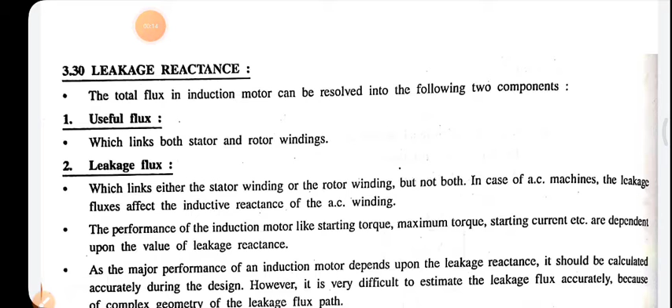Hello students, in today's lecture of AC machine design, we are going to talk about the calculation of the leakage reactance. Now, first of all, when we start the calculations of the leakage reactance, we should be aware of what leakage reactance is, and for that we need to understand a term called leakage flux. In case of the transformer or the induction motor, you might have heard the word leakage flux. What happens?

We are quite aware of the fact that whenever a supply is given to the stator winding, or in case of the transformer, when the supply is given to the primary winding, it carries the current. Due to the current carrying conductor or the coil, there will be flux that is being set up. Now that flux is known as the main flux. Now this main flux links with the rotor circuit.

This main flux that is being generated due to the current in the primary winding or the stator winding, some part of it links with the rotor circuit, some part does not link or links with the stator itself, and some of the flux links with both stator as well as rotor. So this is what happens when the flux is produced. Some part of it links with the rotor, some part links with the stator itself, and some part links with both. So based on that, the total or main flux is divided into two parts, that is useful flux as well as the leakage flux.

Now what is useful flux? As the name suggests, the flux that links with both stator as well as rotor winding is known as useful flux. And the flux that links only either with the stator winding or with the rotor winding but not both is known as leakage flux. Now leakage flux is not desirable for us. In case of the AC machine, the leakage flux affects the inductive reactance of the AC winding.

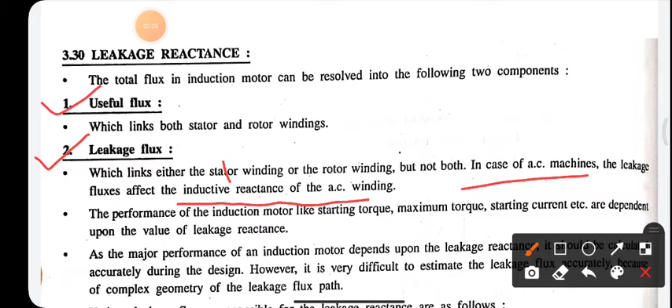Now we all are aware that the inductance is related to the flux linkages. So when the flux linkages change, the inductance, and in return the inductive reactance, changes. Due to the changes in the inductive reactance of the motor or the AC winding, it affects the performance of the induction motor in various aspects like starting torque, maximum torque, starting current, etc., which are dependent upon the value of the leakage reactance. So we can say that the performance of the induction machine is dependent upon the value of the leakage reactance up to a certain extent.

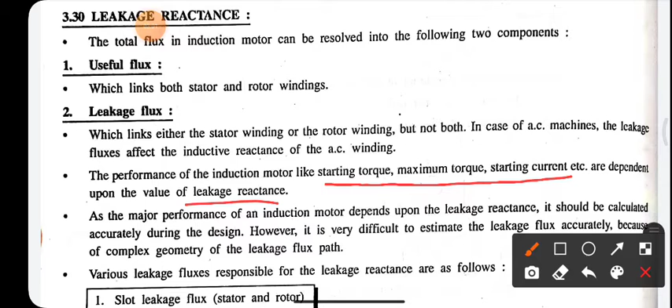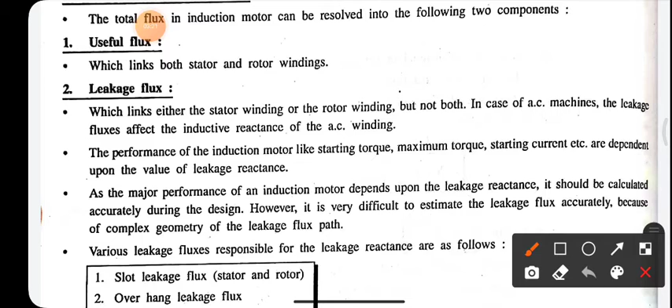So the calculation of the leakage reactance becomes an important aspect for us when we are talking about designing. We need to calculate it accurately, but it is a difficult task. Why? Because in an induction motor there is rotor, there is stator, there is air gap, then in rotor and stator there are slots and teeth at each place. The reluctances will be different, as the air gap length varies, as we have already talked. So it becomes very difficult to estimate the leakage reactance.

Now the various leakage fluxes, or where the leakage flux is present, are given over here. Slot leakage flux, that is for both stator as well as rotor, as I have told you. Then overhang leakage flux, zigzag leakage flux, and differential leakage flux. So these are the leakage fluxes that are present in an induction motor.

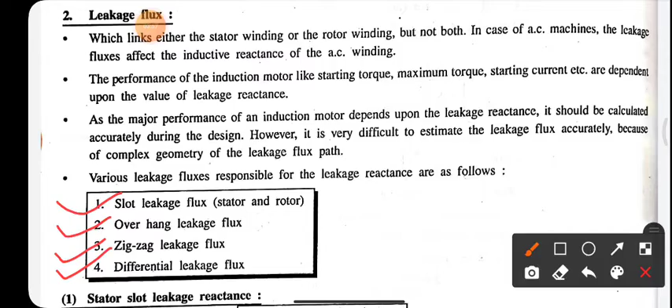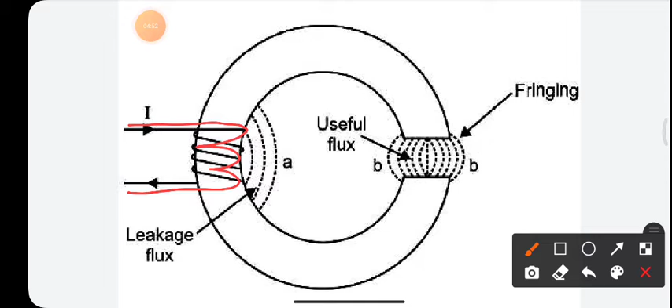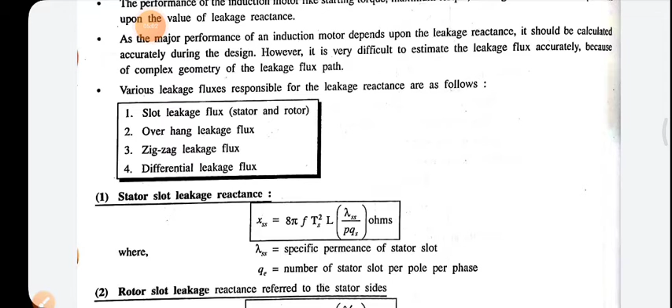Now that is known as our leakage flux, right? So we are going to have the equations of each and every leakage reactance. First, we have seen there are 4 types of leakage flux available. Now, based on that, how can the reactance of that leakage flux be calculated?

So stator slot leakage reactance is given by XSS. It is given by 8 pi f Ts squared L lambda SS upon P into Qs. Now in this equation each notation is quite clear, but the only new notation is lambda SS. What is that? It is the specific permeance of the stator slot. Now what is permeance? Permeance is nothing but the ease with which the flux can be set up; it is nothing but the inverse of reluctance.

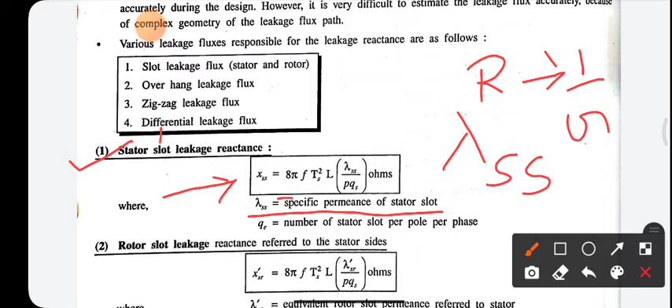Reluctance is nothing but the property of a magnetic material to oppose the flux through it. Okay, and the permeance is nothing but the inverse of it. We can also compare it in the same way as resistance and conductance. In the same way, permeance and reluctance are inverse of each other.

And then there is Qs. Qs is nothing but the number of stator slots per pole per phase, right? So this equation is for the stator slot leakage reactance, in which you should know what lambda SS is, and Qs, that is the number of stator slots per pole per phase, right?

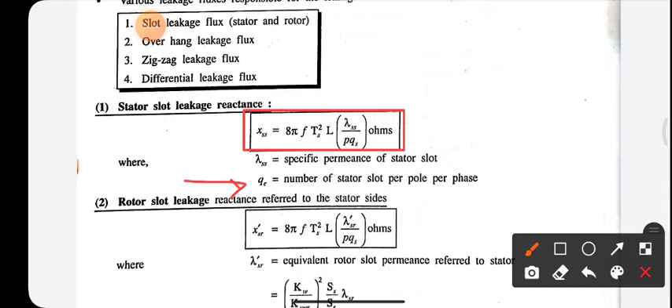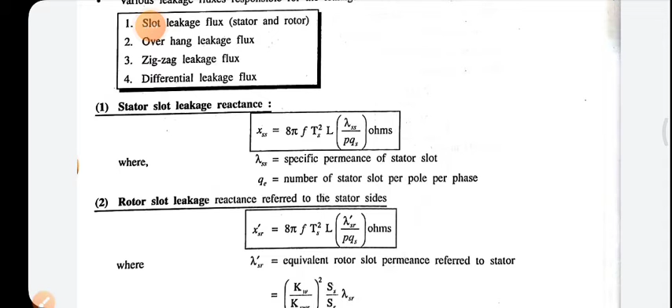So moving further, rotor slot leakage reactance. We have already talked about the stator slot. Now the rotor slots, and that also we have transferred to the stator side. In transformer also you might have done the numericals, or seen the theory in which you are transferring all the parameters either on the primary side or on the secondary side, and they are either multiplied or divided by the transformation ratio, that is K. So in this also we are transferring the rotor slot leakage reactance to the stator side.

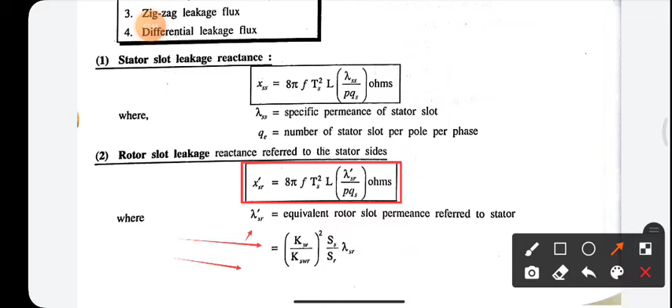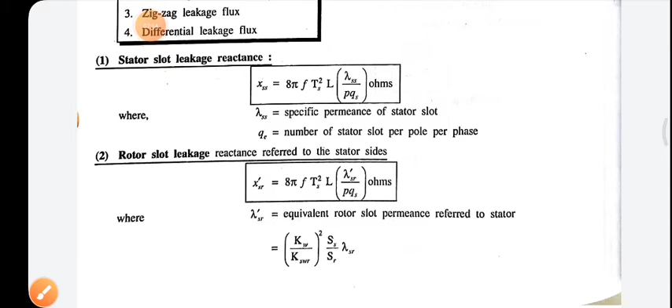So the equation becomes XSR is given by 8 pi f Ts square L lambda dash SR, that is nothing but the equivalent rotor slot permeance referred to the stator side, and for that we have to multiply it with Kw upon Kwr square, Ss upon Sr, lambda Sr. Here Ss is the number of slots in the stator and Sr the number of slots in the rotor. So this is the rotor slot leakage reactance when referred to the stator side.

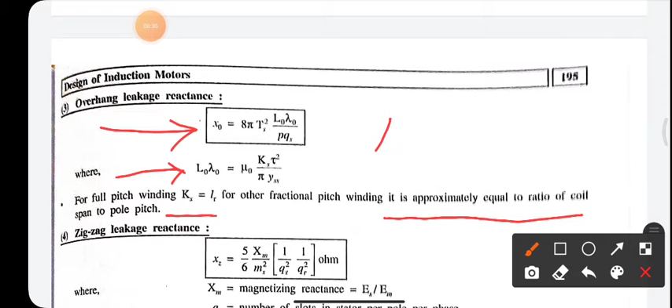Now moving further, overhang leakage reactance. Overhang leakage reactance is given by the equation X0 is equal to 8 pi f Ts square lambda 0 L0 upon P into Qs. Now lambda 0 L0 is given by mu 0 into Ks tau square upon pi YSS. For the full pitch winding Ks is equal to 1. For the fractional pitch winding, it is approximately equal to the ratio of the coil span to pole pitch. So this is the equation for overhang leakage reactance. The derivation is not provided, you have to remember these equations.

Now moving further, zigzag leakage reactance. The zigzag leakage reactance is given by 5 by 6 Xm into 1 upon Qs square plus 1 upon Qr square. Xm is the magnetizing reactance, given by Es upon Em. Qs is the number of slots per pole per phase in the stator. Same way, Qr is the number of slots per pole per phase of the rotor.

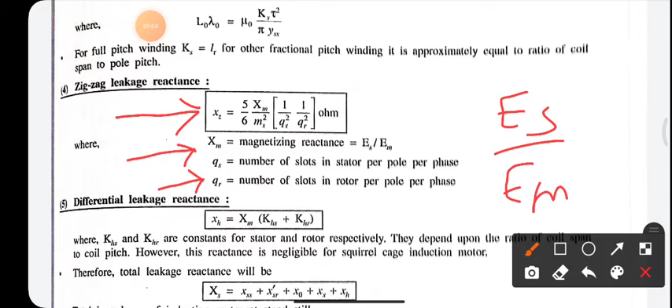Now the differential leakage reactance is given by Xm into KHS plus KHR. These are the constants for the stator and the rotor, and they depend upon the ratio of coil span to coil pitch. This reactance is generally negligible for the squirrel cage induction motor. So now the total reactance is nothing but the addition of all the reactances, that is Xs is given by XSS plus XSR dash plus X0 plus XZ plus XH.

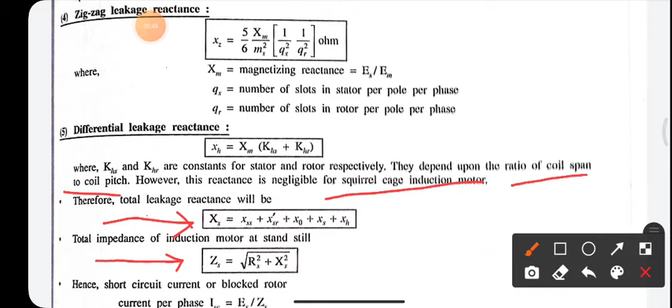Now the total impedance of the induction motor at standstill is given by under root Rs square plus Xs square, right? And when the rotor is blocked, or short circuit, the current per phase is given by Es upon Zs, and the power factor cos phi SC is Rs by Zs.

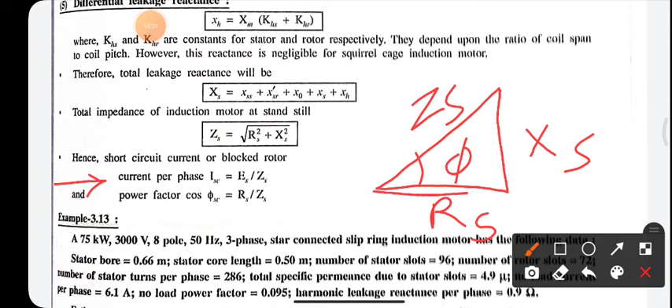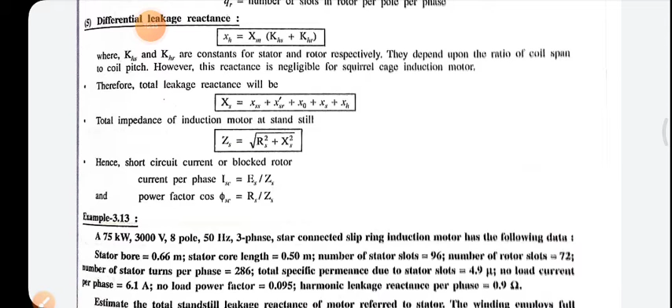Now how are we getting this? Remember an impedance triangle in which there is Z, R, and X, and since we are considering it for the stator, it will be S. So this is phi, and cos phi SC is given by adjacent side by hypotenuse. Adjacent side is Rs and hypotenuse is Zs. So the power factor cos phi SC is equal to Rs upon Zs. So this was the leakage reactance calculation for the induction motor, and based on that a numerical is given over here.

So now here in a numerical, a 75 kilowatt, 3000 volt, 8 pole, 50 hertz, 3 phase, star connected slip ring induction motor. The data is given to us. Stator bore is 0.66 m. Stator core length is given, that is, the main dimensions D and L are given. The number of stator slots is 96, number of rotor slots 72, number of stator turns per phase 286.

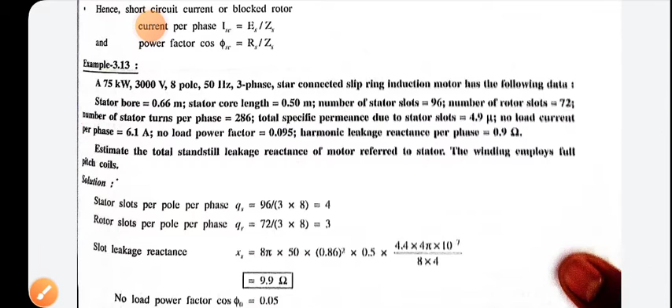Total specific permeance due to the stator slot is 4.9 mu. No load current per phase is 6.1. No load power factor is 0.095. Harmonic leakage reactance per phase is 0.9 ohm. So this is the data provided to us, and what we need to find is to estimate the total standstill leakage reactance of the motor referred to the stator side.

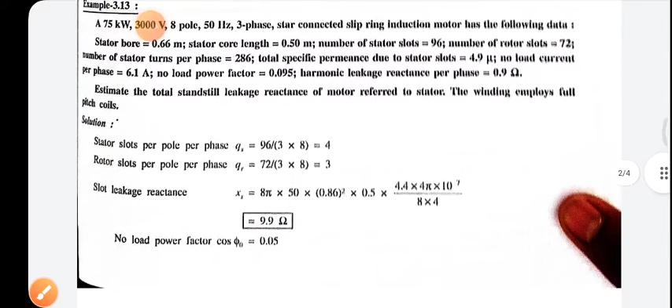Now first of all we need to find the slot leakage reactance, and for that the equation was xs is equal to 8 pi f Ts square L into 4.4, 4 pi into 10 raised to minus 7, upon p into qs. What we require is already provided in the data. When we place those values, we will get the answer 9.9 ohm.

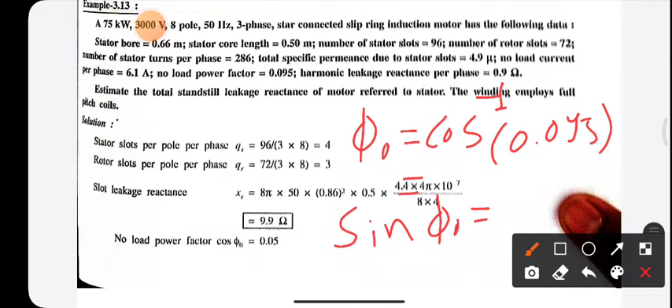Now here the power factor is provided to us, that is 0.095, not 0.05, it is 0.095, that is cos phi 0. From that we need to find sin phi 0. So phi 0 is equal to cos inverse 0.095. We will get the value of phi 0 and place it in sin phi 0, so we will get the value of sin phi 0 also.

Now why we are doing this is we need the magnetizing current. Magnetizing current is given by Im is equal to I0, that is provided to us, 6.3, into sin phi 0 which we have found. So we get the magnetizing current as 6.27 amperes. Stator voltage per phase is given by Es equals 3000 upon root 3, and then magnetizing reactance is Es upon Im. So we will get the value 276.2 ohm.

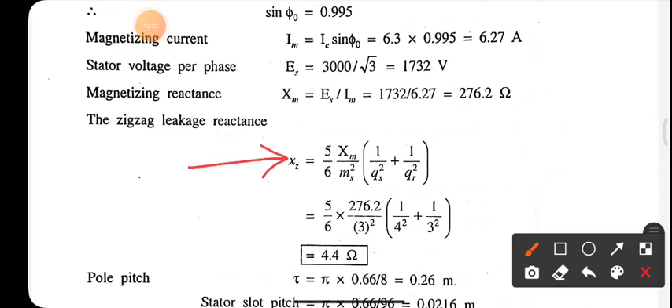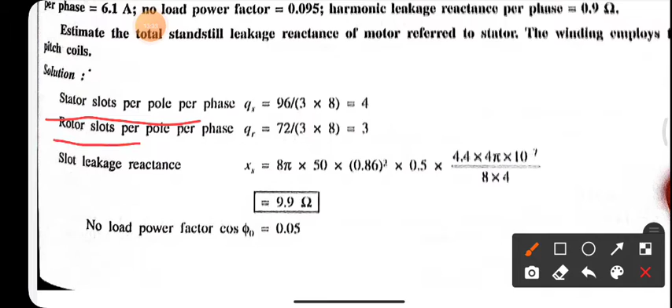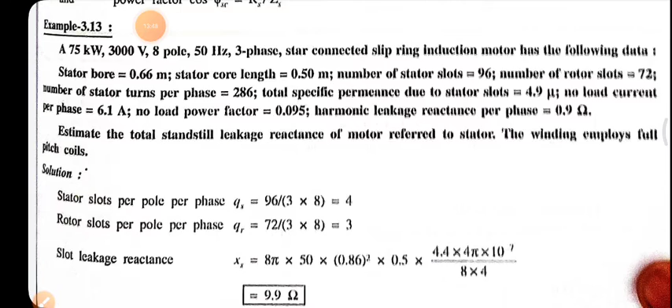Now why we are doing all these things is because we need the zigzag leakage reactance. The zigzag leakage reactance is given by the equation 5 by 6 Xm upon ms square into 1 upon qs square plus 1 upon qr square. These qs and qr are the stator slots per pole per phase and rotor slots per pole per phase. We are provided with the number of stator slots and rotor slots; when we divide by the phases and the number of poles, we get qs and qr, and placing these values we get the zigzag leakage reactance xz equal to 4.4.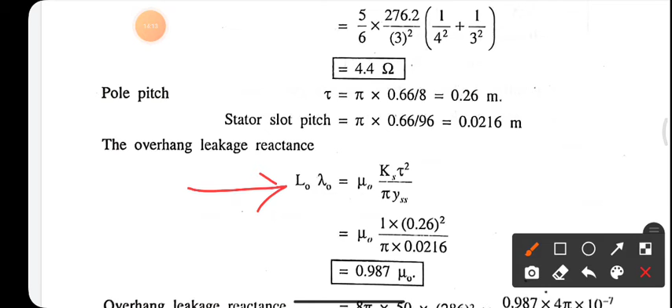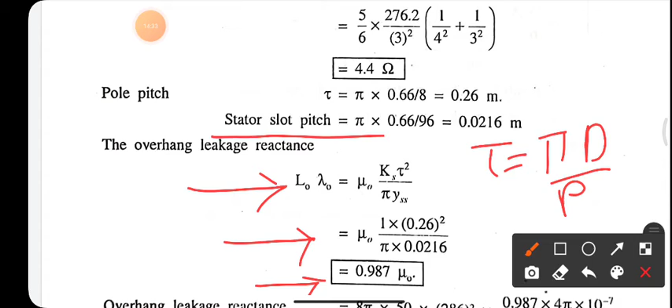Now we are interested in the overhang leakage reactance, which was given by the equation L0 lambda 0 is equal to mu 0 Ks tau square upon pi yss. So tau is required. Tau is nothing but pi D by p, as we have seen earlier. When we place those values, we get tau, and then we get L0 lambda 0 as 0.987 mu 0. So overhang leakage reactance is given by the equation, and when we place all those values, we get the value as 4.0.

Now the total leakage reactance is the addition of all the four leakage reactances that we have found. So when we sum that up, we get the value of the total leakage reactance. In this type of numerical, it becomes quite important for you to remember the formula of each and every leakage reactance. Only then will you be able to solve this type of numerical.